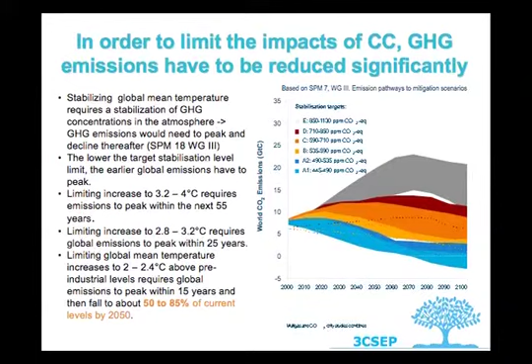But even to achieve that, what it means is this blue scenario. This means that basically we'll have to peak emissions within less than 15 years, and then we have to reduce them by 50 to 85% as compared to today's levels by the middle of the century.

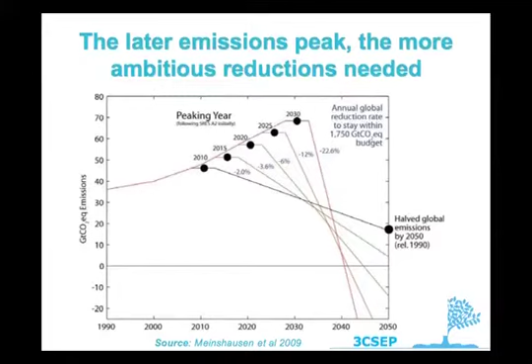And even worse, what does it mean here? That if we wait too long, we actually have to go to negative emissions. It means that in later years, we actually have to sequester more carbon than we emit. So we could again go on very long about this, but the point is that the challenge is humongous. And it's true that Copenhagen did not solve this challenge yet. There is no global treaty yet that would force us to go for these ambitious reductions.

At the same time, perhaps that's why it's even more important to understand how else we can get there, since I'm sure most of you still plan to be around for 1 or 2 more decades, or perhaps you have children or plan to have children, and clearly you don't want such a life for them. For example, these are some pictures of average warming. This is one scenario. There are many scenarios. I just picked one, and clearly it's a bit higher than some other scenarios.

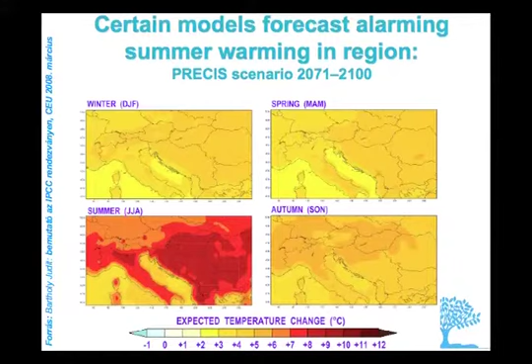But nevertheless, it's still very frightening because it shows that in the region where we are presently, summer warming is going to be much worse than the rest. So when you talk about global average 2 degree centigrade warming, that's actually not the real thing. What you really have to be thinking about is what's happening in the summer, especially in cities. So this figure shows that in much of this region where we are today, we are talking about 8 to 10 degrees centigrade warming in the summer months. And okay, you think you're not going to stick around that long, but it's not going to happen that nothing happens until 2070, and then suddenly from one day to another it is 8 degrees centigrade.

Now, even worse, there is global warming, but in fact, we compound that with a lot of local warming. First of all, many of you already are very well aware of the heat island effect. And that is certainly going to make our settlements much worse and much less habitable. And buildings are extremely responsible for this, not only the outer building surface albedos and so on. This is a picture of London, and what this shows is the tremendous concentration of energy being used. Now, the problem is that any energy you use, at the end of the day, is going to end up as local heat pollution, due to the second law of thermodynamics.

So basically, when we are talking about significant warming, it's very important to look at these local small impacts as well. And so this gives a special new importance to very low energy buildings. It's not only about how much will be emitted at the power plant, but it is also important that you use that electricity in the room, because all this lighting in the end will end up as thermal pollution, and also your air conditioning will at the end of the day end up as local urban thermal pollution. So the challenge, from the perspective of adaptation, vulnerability, impacts, and mitigation, is humongous.

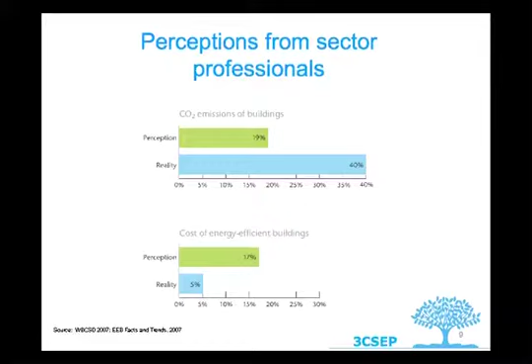So in fact, buildings are the single biggest source of our energy-related carbon dioxide emissions. At the same time, the cost premium for high-efficiency buildings, as many examples were presented this morning and yesterday and hopefully today and tomorrow as well, in fact, is much lower.

But professionals gave an average of 17%, whereas we know that it doesn't even necessarily have to be a price premium if the architects did their job well, and so did the contractors. So there is this huge difference between perception and reality. So we have a very important job to actually take care of certain capacity building.

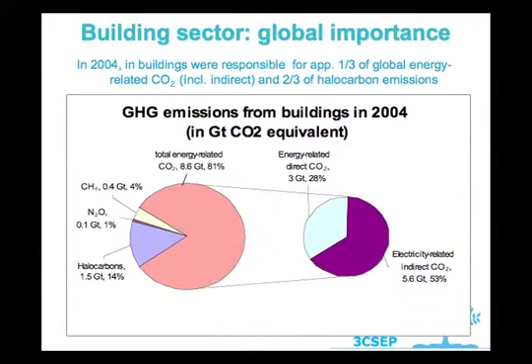So that's reality. This is from the fourth assessment report of the IPCC, which I had the privilege of leading the buildings-related work in. Basically, buildings are responsible for 1/3 of global energy-related CO2 emissions, and we shouldn't forget about other non-CO2 greenhouse gases, because actually 2/3 of halogenated gases are also emitted in relation to activities in the building sector. So it's not quite all the same what type of insulation we use and so on.

But let's look at another sad figure, why buildings are especially important in our region, in Eastern Europe. This is a preliminary figure from the Global Energy Assessment, and we are still working to improve it, and my colleagues who are working on this also sit in the audience. Basically, what this figure shows is the specific energy consumption of 3 types of buildings: single-family, multifamily, and commercial and public, in the different world regions.

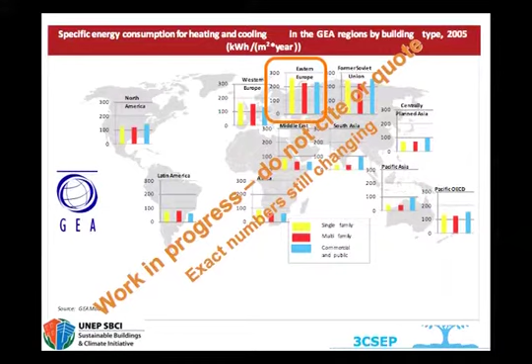Now, the sad thing is that Eastern Europe is by far the highest, together with the former Soviet Union, and not highest by a little bit, but quite significantly higher. And even if you compare specific energy consumption in the same climate zone or climate type around the world, unfortunately we are finding that this can be as much as double that of other regions, or perhaps even several-fold higher. So we definitely have a huge challenge to address the existing building stock.

So yes, buildings contribute a lot to climate change, but how much can buildings actually help in reducing and addressing climate change? My statement is that there are few sectors which can deliver the magnitude of change that we need. We have been talking about 50 to 85% or even higher emission reductions. There aren't really many sectors where we know the technologies, where we have them standing around us, that can fairly easily deliver this magnitude of change.

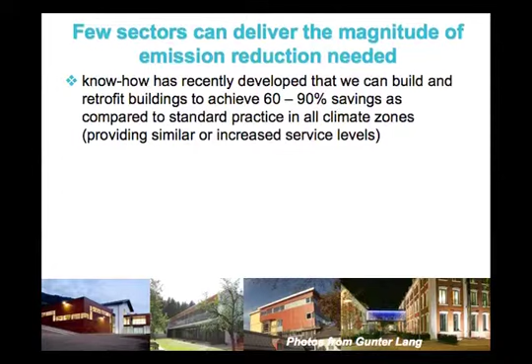But we know that we can build and retrofit buildings that achieve 60 to 90% savings compared to standard practice in all climate zones. So what we are doing for the Global Energy Assessment is trying to quantify that precisely.

There have been many estimates earlier of how much buildings can deliver, McKinsey and so on. But why I don't like many of those studies is that they still consider buildings as sums of components. What if I do a little bit of fix here, a little bit of fix there, and if I've done these two things, that's not too cost effective anymore, let's forget about that. But that's not how we think about buildings. Buildings are systems, and we plan and design, especially good buildings, as a whole.

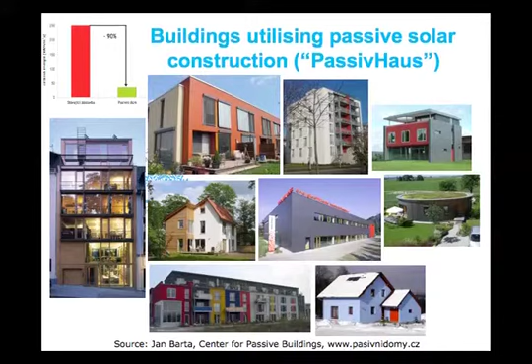So if we look at buildings as a whole, in a holistic perspective, let's see what we can achieve. These are just some examples: passive buildings can achieve about 90% reduction in emissions and energy consumption in new buildings. However, those are new buildings, and that's the problem, that very often we are too obsessed with only new buildings. And I understand, that's more interesting for architects and for the construction industry.

But one of the messages that I'd like you to take away from this conference, or at least from me, is that in this region, and in fact for the whole world, or at least the developed world, retrofitting buildings is significantly more important from a sustainability perspective than new buildings. There is very little new stock added to the building stock each year in developed regions, whereas this is the opposite in developing countries.

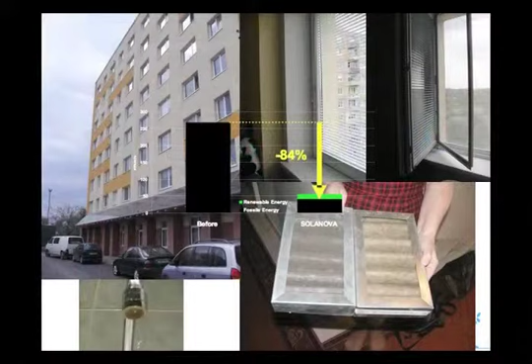Fortunately, the good news is that we can deliver almost the same amount of reduction in retrofit. This is the Solanova example in Dunaújváros, which demonstrated that you can achieve more than 80% reduction with no rocket science, just good planning and state-of-the-art execution and implementation. But this is not about just sticking a little bit of insulation there and changing a window there, but a holistic approach, good planning and good execution. So it does require a more sophisticated approach.

So what happens if we proliferate this practice? What would happen if we built only these very high efficiency new buildings, and if we retrofitted all of our building stock similarly to Solanova? So nothing fancy. Don't look at the figure yet, it may confuse you, but basically if we just proliferate this best practice and even allow some learning that the industry and architects need to do, but we don't do anything else, just proliferate what already exists as best practice today on the ground.

And this is some final energy consumption scenarios for the Eastern European region. Look at the second figure. And this is only heating and cooling energy use, it does not include electricity use. So what we see, if we do proliferate these best practices, we can actually reduce final energy consumption by the middle of the century by 60%. And that's only with efficiency. We have not yet modeled if we integrate renewable energy into buildings. That will be the next step we are going to do.

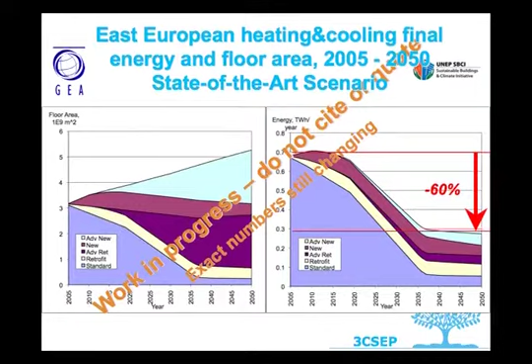And this is against the trend that, in fact, the building stock is expected to roughly double, not quite, but almost double during the same period. So we are talking about a significant opportunity. But again, what you see, renovation takes a tremendously important role. So this dark red and yellow are basically the floor space that needs to be renovated by the middle of the century. And this is how much the energy consumption can go down in this floor space. So there is a tremendous opportunity from a climate change perspective.

However, the problem is that every opportunity has also a risk. Whenever you have a big responsibility, there are always challenges with it. Now, the problem is that there is a big risk, and right now we are very much taking the risky path. Why? Governments have realized this. Many governments, and Poland has really led the way in Eastern Europe, understand we have a bad building stock, we have to fix it. And many other countries, perhaps all countries in our region, do subsidize and support building retrofits. But let's see what's happening.

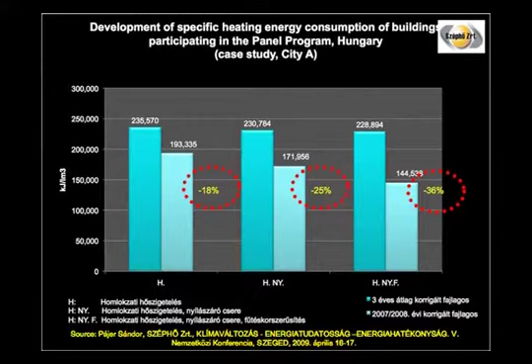I'm going to talk about the lock-in effect now. You don't need to understand anything from this figure. It just shows one selected subsidy program from the region. It happens to be in Hungary, in one particular city, but it doesn't matter. We could take any city. And what this shows is that instead of the 80 to 90% savings that we know is possible and we know pay back, these programs have achieved reductions of about 18%, 25, 36%. So basically, instead of the 80, 90%, we are only achieving 20 to 30 to perhaps 40% reductions in energy use.

Not only are we not going to reduce emissions, but actually we are going to increase our emissions in Eastern Europe. So instead of reducing by 60%, we are going to increase by 8%, resulting in an approximately 70% lock-in risk. So we are locking in these emissions. Why? Once you've retrofitted a building in a complex way, so it's not just a little insulation here and there, it's very hard to come back to that building again.

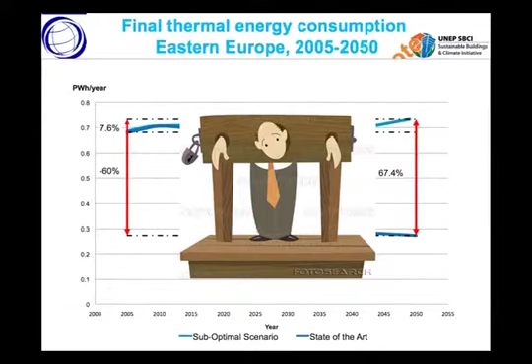So basically, because our building stock in Europe hangs around for so long, we have a very high risk of lock-in effect. This means that we locked in about 70% of our energy consumption and probably a similar amount in CO2 emissions. We have not yet calculated the CO2 emissions. As you see, we are still working on the exact numbers with Andy Butcher, who is sitting in this audience. So that's the lock-in effect, which we don't think about a lot, but in fact it does have very important policy implications.

So, I gave all the bad news. Let's talk a bit more about the good news. So let's talk about the co-benefits. Why else should we do this than just for climate change? Of course, one of the reasons is also money. Especially in the era of financial crisis, I think none of our countries have ever been so rich that this wouldn't be the bottom line. You know, how much is it going to cost and what is it that we are going to save?